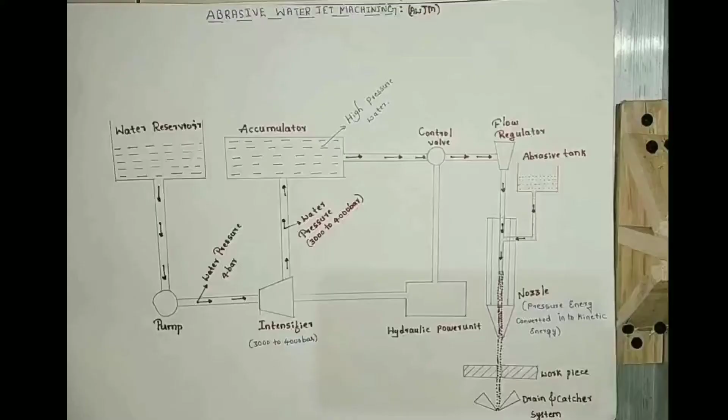So today I am going to explain about abrasive water jet machining, that is also called AWJM. Abrasive water jet machining is almost similar to water jet machining. If you don't know about water jet machining, you can go to my previous videos, where I explained water jet machining. Here is the main difference between abrasive water jet machining and water jet machining.

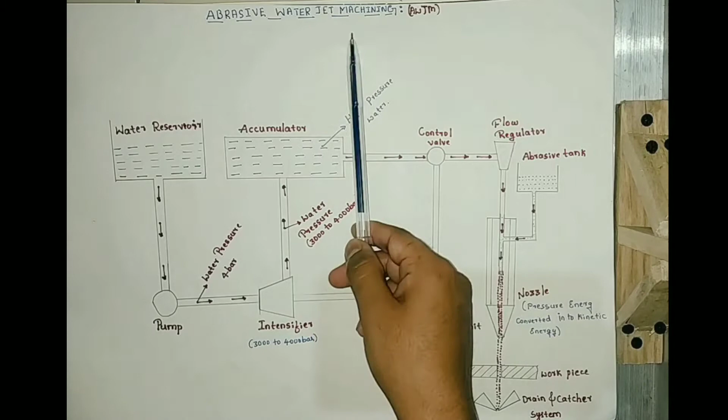In water jet machining, water is used to cut the workpiece. But in abrasive water jet machining, both water and abrasive particles are used to cut the workpiece. I will explain the basic construction of abrasive water jet machining.

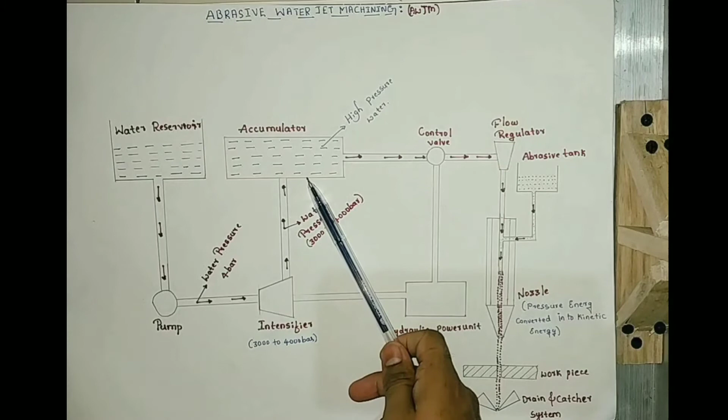Abrasive water jet machining consists of a water reservoir which stores the water, and that is connected to the pump. The pump helps to drive the water from the water reservoir to the intensifier, and the intensifier helps to increase the pressure of the water. The intensifier is connected with the accumulator. The accumulator helps to store the highly pressurized water coming from the intensifier. Then the accumulator is connected with the control valve, which controls the pressure of this water.

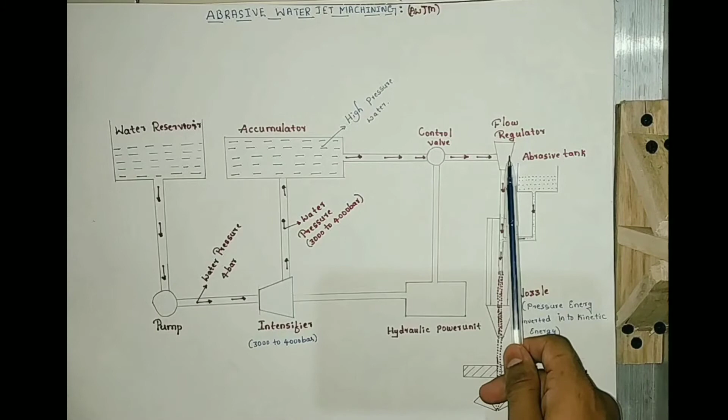Then both the control valve and intensifier are connected with the hydraulic power unit. The hydraulic power unit supplies the power to run this system. Then the control valve is connected with the flow regulator. The flow regulator regulates the flow rate of water. The flow regulator is connected with the nozzle.

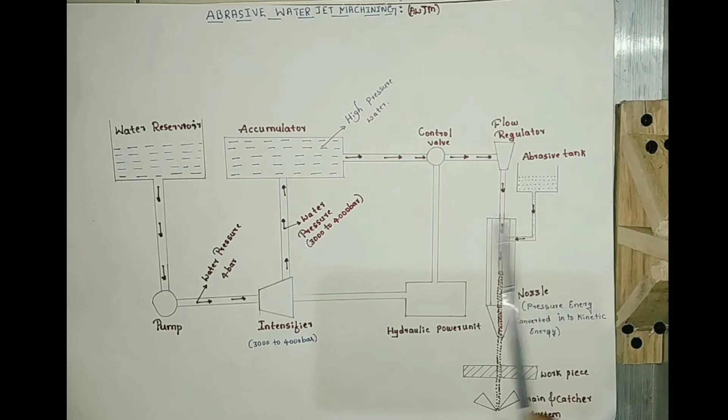Here the abrasive tank is also connected with the nozzle. The nozzle helps to strike both abrasive and water molecules on the workpiece surface in order to cut the workpiece. This is all about the construction of abrasive water jet machining. Now I will explain the working principle of abrasive water jet machining.

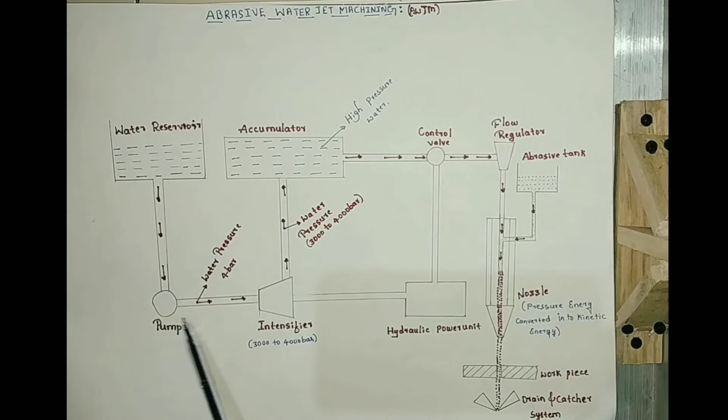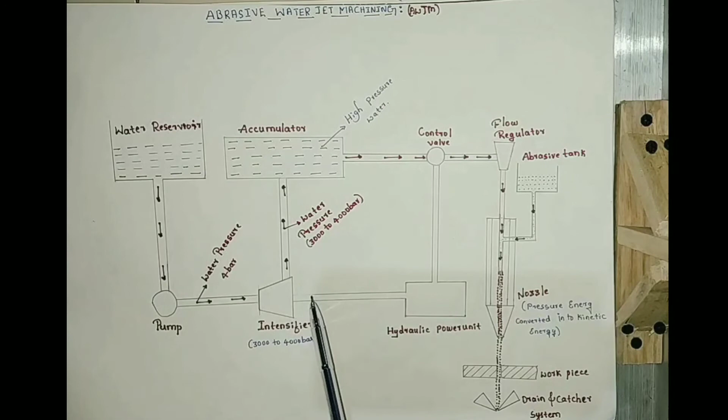In working, initially the pump drives the water from the water reservoir to the intensifier. When the water passes through the pump, the water has a pressure of 4 bar. When water enters the intensifier, the intensifier increases the pressure of water from 4 bar to 3000 to 4000 bar. This much pressure of water is required in order to cut the workpiece.

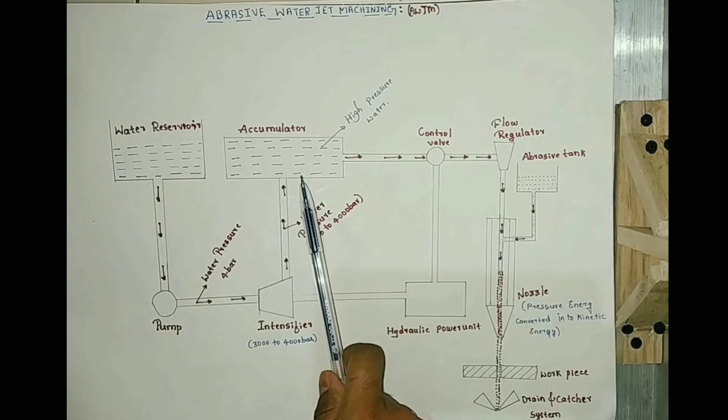Then the highly pressurized water at 3000 to 4000 bar enters the accumulator. The accumulator stores the highly pressurized water on a temporary basis, to use this water when a larger amount of pressure energy is required. Then the highly pressurized water passes through the control valve. The control valve helps to control the pressure of this water.

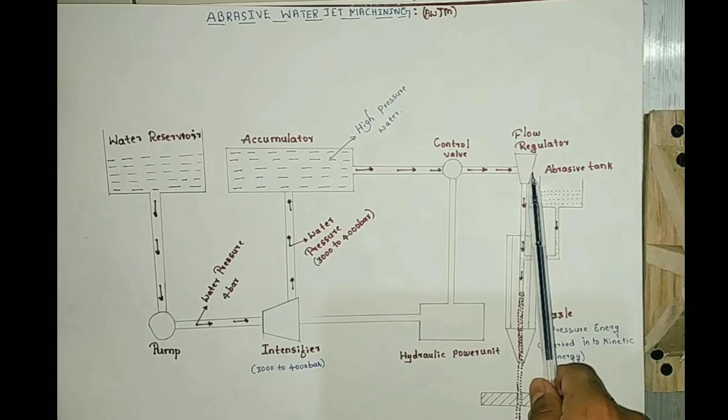Then the water passes through the flow regulator. The flow regulator regulates the flow rate of the water. Then the water passes through the nozzle. Here in the nozzle, abrasive particles from the abrasive tank enter the nozzle. Both abrasive particles and water molecules mix together through this narrow portion.

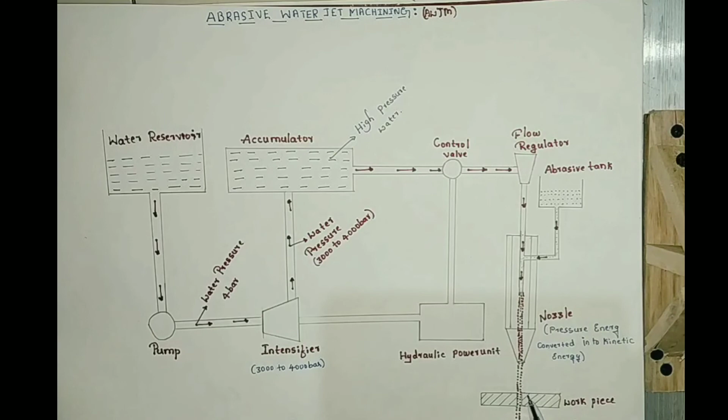Because of this narrow portion of the nozzle, the high pressure energy of the water and abrasive particles is converted into kinetic energy. With this kinetic energy, the abrasive particles and water molecules strike the surface of the workpiece very forcefully. Because of that high impact force of water and abrasive particles, the workpiece is cut into two parts.

After that, the used water is collected in the drain and catcher system. So this is all about the working principle of abrasive water jet machining.